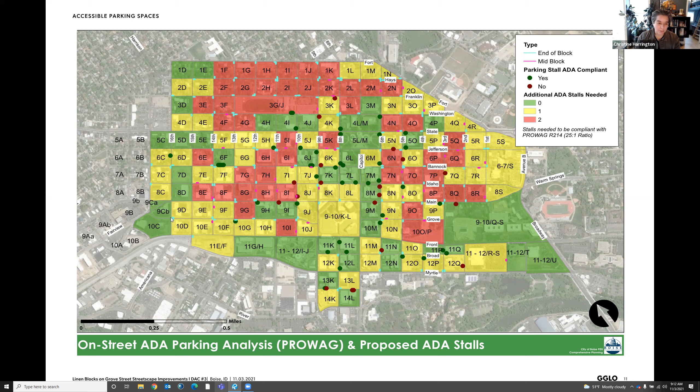So let's take a look at parking and circulation. We heard your feedback that parking is really important, so we want to maximize those as much as possible. We also have to adhere to the proposed ADA stalls from a study done by the city.

Our blocks are right here, and as you can see, we have quite a few ADA stalls that we need to provide. So we took a look at our design and met with an accessibility advisory committee, who were extremely helpful in locating and helping us identify which areas those should be.

All in all, we were able to regain some parking stalls. Currently we have 102 parking stalls available along Grove, and we added some along the side street, which I'll show you in just a second. We have 11 ADA stalls scattered throughout the blocks, and we'll show you how incorporating those into our innovative design is enabling us to create a really great public realm.

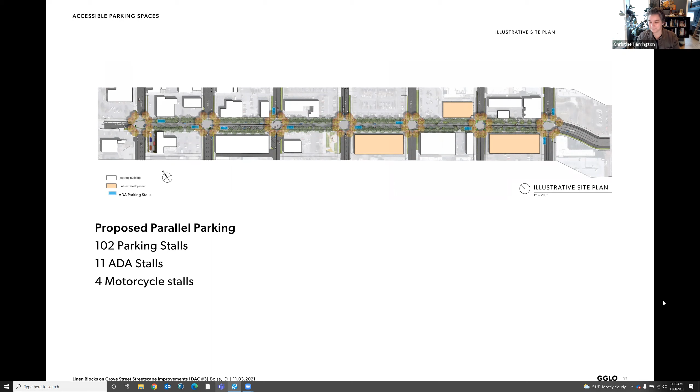To maximize the stalls, because of how some of them are oriented, we were also able to squeeze in some motorcycle stalls. We might be able to put more in — we'd like to get your feedback on that, but we're trying to squeeze out every single nook and cranny for parking.

Throughout all of these sections, I'm going to focus on a few different blocks to show you how the design has evolved. This is the block between 15th and 16th, and we'll take a couple of sections through these areas to show you how it's all coming together.

This may look pretty reminiscent of what we had shown before, but one thing you may not be noticing is that we were able to get ACHD to agree to reducing our travel lanes down to 10 feet. This was imperative in getting all of the parking stalls and ADA parking stalls on both sides of the street, and also increasing our pedestrian space and planting within that public realm. We're very excited that they supported us in that, so you'll see how that works throughout the sections coming forward.

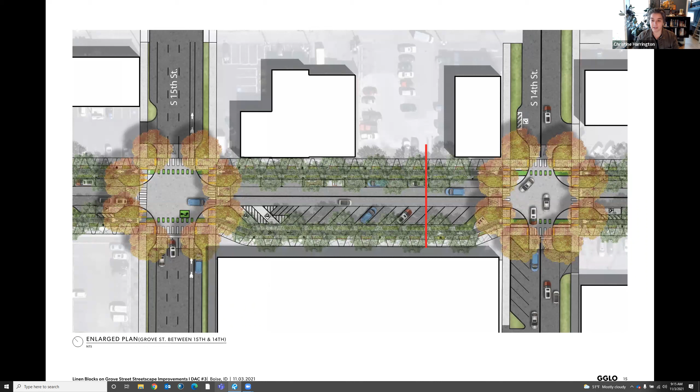So we're cutting through right here at an intersection, and we have these large planting and curb bulbs. We still have the 5-foot bike lane. We had to reduce the site furnishing and planting zone down to the 4-foot required space by the city, in order to maintain the 8-foot sidewalk, which also allows for some spill-out retail. The other thing you'll notice here is an example of a buffered wall and buffered planting for existing parking lots — we can talk about how that might work on your specific parking lot designs.

Now, this is the block between 14th and 15th. We've been working very diligently with the property owners to maximize the parking in this area. Through that effort, we have jogged the sidewalk and the bike lane over into the private property. The city is going to have a public easement in that area, and they're working through all of that in order to gain back angled parking, which maximizes the parking within this block.

As you can see, we have to provide front-end pull-in ADA stalls, which enabled us to squeeze in a little bit of motorcycle parking to maximize the area. Let's take a look at that section really quickly.

This is pretty much a typical block on the right-hand side, where we have our 10-foot travel lane in the middle, 8-foot parking, 5-foot walk-off strip and planting strip, 5-foot bike lane, 4-foot planting with pet rail, and an 8-foot sidewalk. Then on our unique angular parking, starting from center, we have the 10-foot travel lane, 18 feet of back-in parking, our walk-off strip, bike lane, planting with pet rails, and the 8-foot sidewalk.

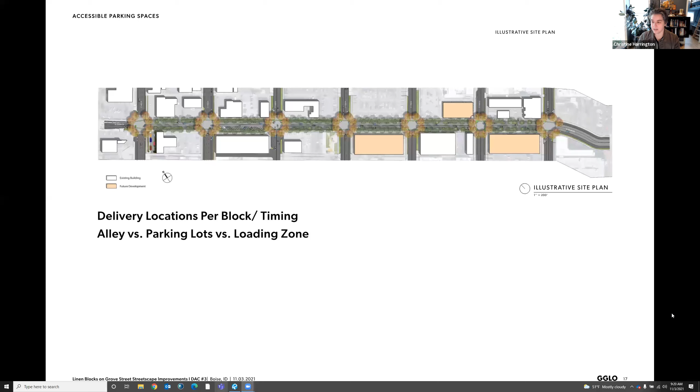Great. Anybody else? We'll continue to think about how that would work, and as we work through the parking regulations, we'll circle back with business owners to coordinate that. We want to make sure that we understand that you are able to get your deliveries in a timely fashion and make it easy for you. And also we want to ensure ACHD that there won't be giant commercial trucks parked in the middle of Grove Street. So we just want to make sure everybody is comfortable with the situation.

Okay, so we also talked a few slides earlier about parking lot screening. We think it's really imperative to create a welcoming public realm, and with that, it's really nice to have a buffer between cars and people. We've done that on the street side, and now we want to work with the private property owners to do it on the property side. So what we've done here is indicated some suggested areas of buffering. All of this would happen on the private property. Amy, can you talk a little bit about how we can maybe coordinate that?

Yeah, so CCDC, we cannot actually expend funds on private property. We can only do improvements within the public right of way. But on previous projects, we have had success in property owners approaching the contractor and working out a deal that they could do some private property improvements directly with that property owner while they're out there, just for some efficiency and maybe some cost savings to get cheaper improvements if you're interested in doing improvements on your private property. So that's something you could approach GGLO with as we get closer to construction, if there's improvements you'd like to see, such as these screenings that Christine's talking about.

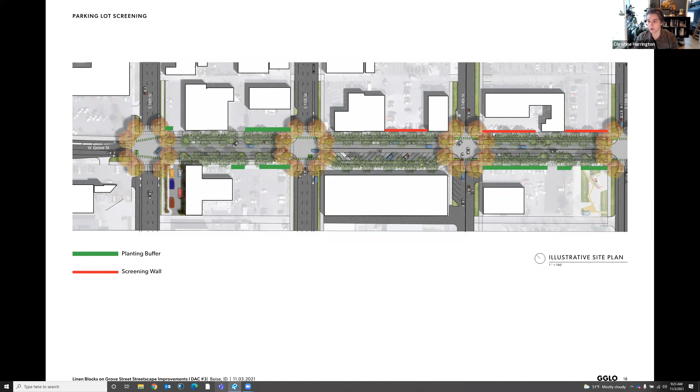So here, a lot of these planting areas may already exist and walls may already exist within this. For example, the planting out here between 15th and 16th is already there. The wall next to the Linen building is already there. Wall next to the Modern is already there. So we're kind of trying to create this pattern of buffering.

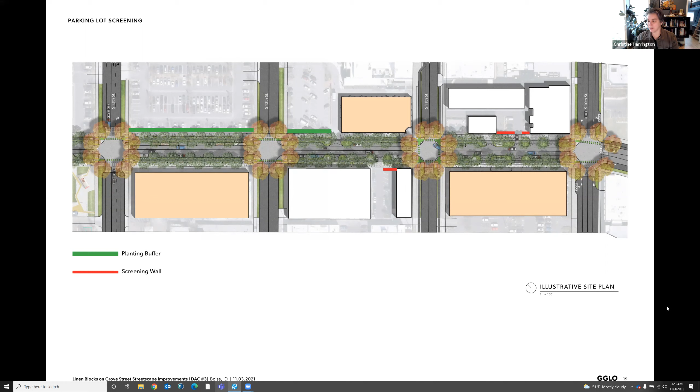Along Grove Street, the planting along the Idaho Power parking lot is already there, as well as some planting here. So just adding a few site walls might be a really nice way to buffer the streetscape. Any questions on any of that just shown?

This is Steve Welsh. I was just curious, so that angled parking, will that be open to the public or is that private parking? No, it's public parking. But we're exploring some regulations that would help with turnover, potentially doing some 20-minute stalls for those quick grab and go stops at like the liquor store or the beauty supply store, and just being strategic on how it's regulated so that we can serve multiple needs, including those business retails, but providing still public parking.

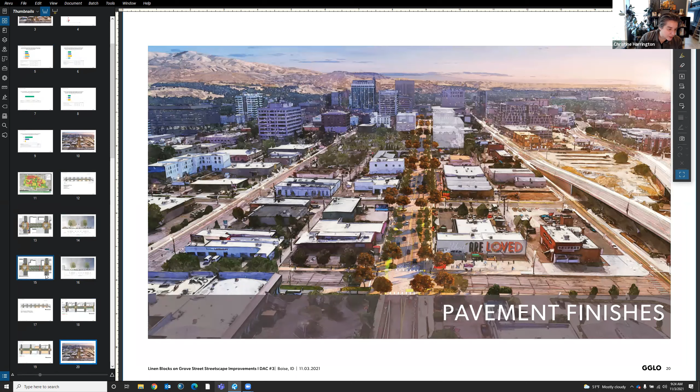I also forgot to show that. Let me get out of this really quickly. We also added some parking over to the side. We converted some parallel stalls here because we had enough room to have back-in parking here too. So we're trying to maximize as much as possible.

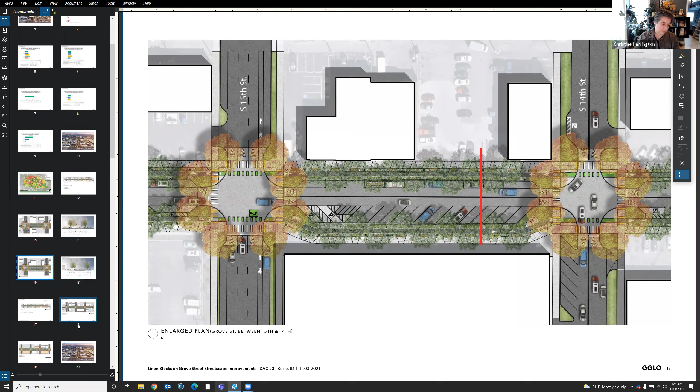We looked at doing that on this other side, but based on just the truncated curb, the linear curb length there, we were not able to maximize anything. So whether we did back-in stalls or parallel stalls, it was always just going to be 4 stalls there. So we are going to leave the parallel parking there, but convert on the other side of 14th to the back-in angled.

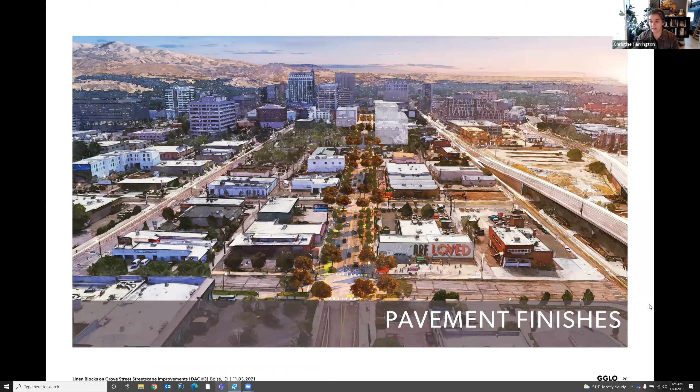Okay, so now going into pavement finishes. We're going to zoom in a little bit. We heard from you in the public survey that pavement finishes is an added bonus to the identity here. And what we've talked about before is keeping it pretty simple, right? We want to have something elegant.

We are thinking of this as more of the canvas that we're going to be putting a lot of other elements on. Think of it as the gallery walls that we'll be adding public art to, different planting to. So we don't want this to be the main feature, but we do want it to be elevated. So in that, we were thinking about how can we utilize the inspiration of the linen blocks and the linen building as kind of a takeoff for our design.

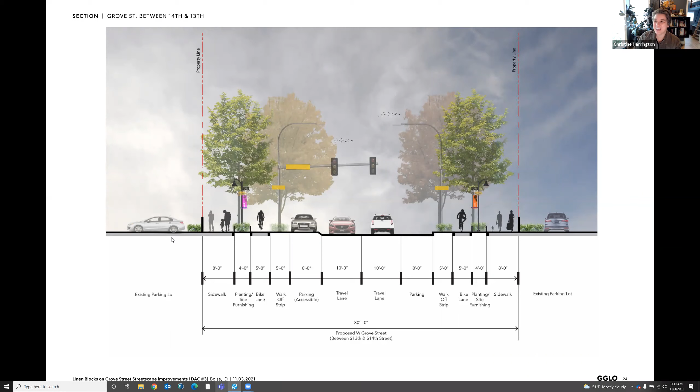So any questions about pavement finishes? Let me go back. Do you guys like that idea? Is it resonating with you, this more minimal color tone, but having a lot of unique textures that would create identity for the Linen Blocks?

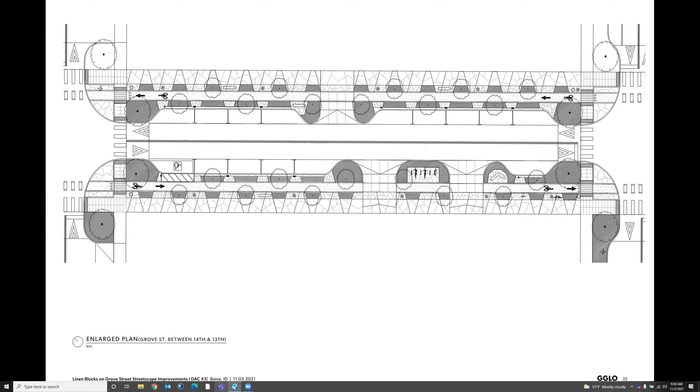This is Steve Welsh. I think it's really cool. Thank you. This is Elizabeth. I agree, I think it's really good looking. Great.

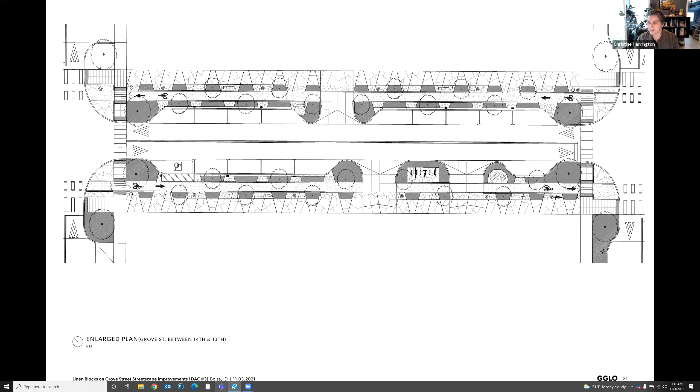It actually enables us to save a little bit of money on the concrete, since we're not doing multiple colored pours. So it's a really nice way to create a differentiator in this area without spending tons of money. We're excited about that.

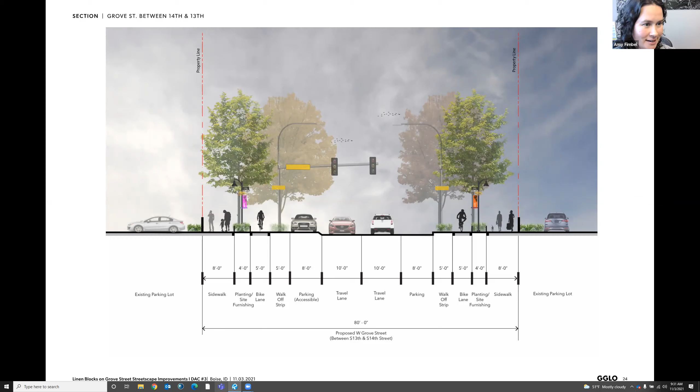We've got a good contractor that's great at concrete work, so they're going to have some challenges. It's all about craftsmanship. Squares of concrete are easier to pour than custom scoring jobs, but Guho's up to the task, so we'll be able to do it.

So the next steps we're working on with them is starting some mock-ups, like how do we get that linen texture? Is it through different types of broom finishes, or different types of stamps, or just how do we do that whole thing? We're going to start diving into that in the next phase of work, which is always my favorite, doing mock-ups and exploring that with the contractors and really getting a level of craftsmanship.

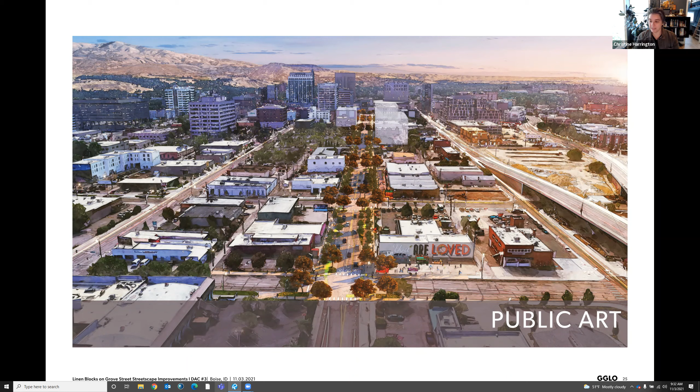So the next section is public art. We heard from the public that the neon sign museum, they were really enthralled with that idea. So we've started to work with Arts and History to create an art master plan. How can we overlay all these elements within the area? And then we can start looking at budgets, how we can maybe get some private donations from people to enhance some of these artworks.

Basically what we are looking at is creating an art billboard on the blank sign that's at 15th, expanding the public art frames on the walls that may buffer the parking lot and the sidewalk, and creating these art ports, which we're really excited about.

We've been working with the college and their art department. They say, hey, if you put these art ports out there, we will use them with our sculpture classes. So they're really excited to have a way to display emerging artists within the downtown area and the Linen Blocks area. And then also the historic Boise Neon Sign Museum.

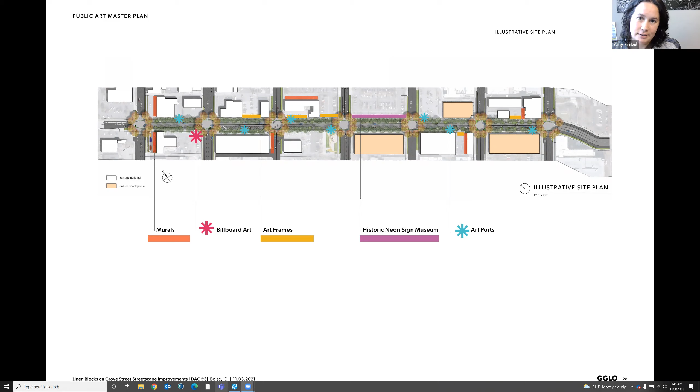I know you can do QR codes built into them, and kind of do a breadcrumb trail, like Christine's talking about, to lead them to the next public art, and you can really make this linear art gallery feel having them along this whole corridor.

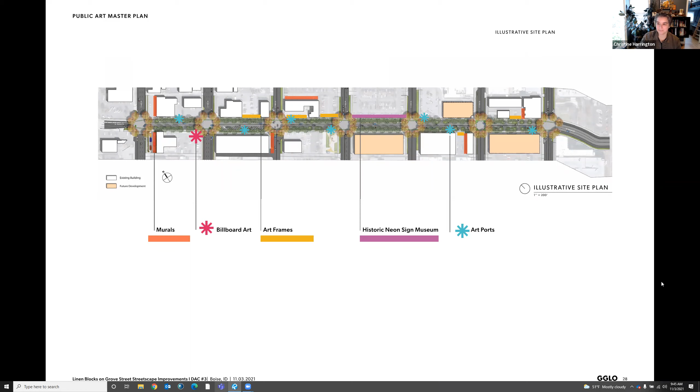Really good Instagrammable moments.

So as we start to look at these areas, we don't have an actual available neon sign yet, but we're looking at how these can fit, the height of the signs. Some are a lot longer, so would they overhang? Some are more linear. We're working with the contractor right now - once we identify the best candidates, they'll go out, take a look, weigh them, measure them, get an accurate understanding of what it will take to refurbish. Then we'll start to design the art port or foundation they would sit on. These will be, like Amy said, part of the public art.

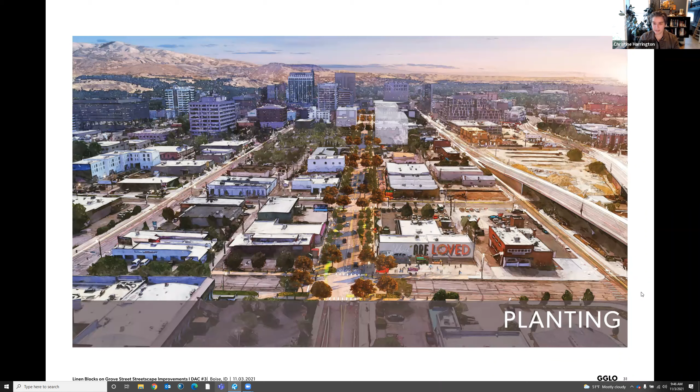Now going into planting, we've been working with the city on lots of different things. We are invested in doing silva cells for the trees, a variety of trees with as large a caliper as we can get into the areas, planting areas with pet rails - Parks and Public Works have supported that. Habitat for native pollinators - we've been working with Public Works and they've been supportive in helping us get that engaged.

A big win I'm really excited about is consolidated irrigation. Typically along the streets, each planting area outside of businesses has its own point of connection for irrigation. We wanted to consolidate all of that to run on one system, so we can ensure all the trees and planting areas get watered. If a building is sold and somebody turns off the water, we don't want all the plants to die in front of one building. We've worked with Parks and the city, and they are supporting this consolidated irrigation - we're really excited about that.

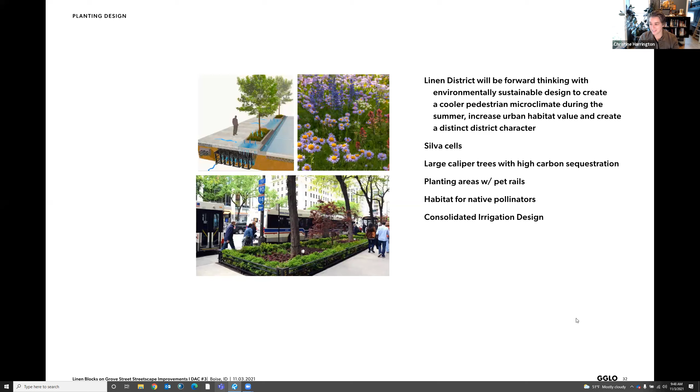I cannot tell you how excited. So we will be taking it away from you and all of your buildings and giving it back to the city.

So we've been working on the tree and plant palette. What we're looking at is creating this identity, these nodal trees at the intersections. We're looking at a very large tree species, potentially a northern red oak, and then intermediate interstitial trees being honey locusts staggered along the streetscape. Both are very large canopy and will provide a lot of shade - we're really excited about that.

Then as we looked at pollinator plantings, how do we ensure people understand their use and don't get confused, because pollinator planting areas can look a little wild. Most of us in the urban environment are used to much more structured planting. So we wanted to see how we can do a bit of both, so people understand where the pollinator planting areas are and that they're working in a specific way.

Parks has done this in areas throughout the city - they have a signage program that informs people what the planting is doing. So it's not just a wild, unkempt meadow of flowers, but a monarch habitat, a butterfly habitat, or a bird habitat. We're going to start looking at each pollinator area as we go, create different habitats that we'll identify, sign, and really educate the public about.

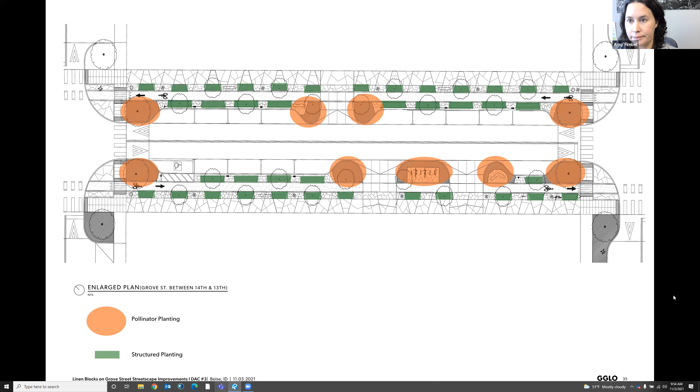While we appreciate you having all the controllers and points of connection in your building so it doesn't clutter up the street, we understand it's probably cluttering up your basement. Well, it would be easier if it was in the street, because the people who show up to blow out the sprinklers could show up any time of day and do it, versus having to coordinate to get inside the building.

Right, so just looking at how this lays out on this block. Again, we're proposing the pet rails only on the sidewalk side, not on the walk-off strip side or between the parking and the bike lane. We think that's the most useful and best use of funds to consolidate it there, since pets are usually walking on the sidewalk, not the bike lane. We think that'll provide enough buffer to maintain that.

One thing I have to say is that as we've cruised downtown Boise and all the streets, we've talked about this previously - there's either lawn or pavement within the right of way, whereas on areas like Capitol Boulevard we have planting. We've been told time and time again it isn't very successful, and I think part of that is the consistency of watering. So we're going to take care of that part on the design with the city.

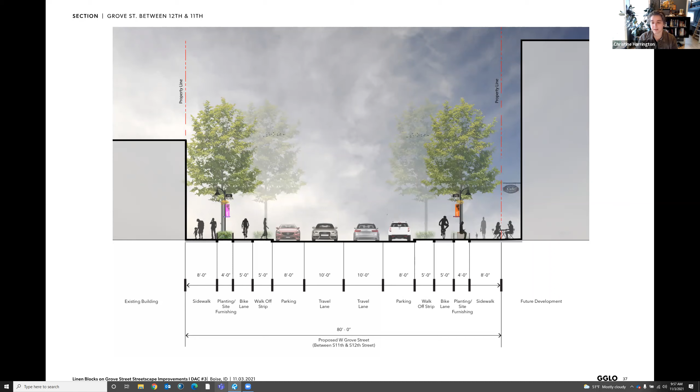Can you imagine a way this area could create some sort of stewardship or committee to help people who don't know about planting or gardening - or organize volunteers to come out and do a cleanup party? Is that something that as business owners and stakeholders you'd be interested in? The thing we don't want is to create all these planting areas that just die, so we're going to need some help. What are your thoughts?

Well, my thought is I'm doing it now anyway, so yeah, I'd be willing to do it. Great. Yeah, we'd be willing to do it as well. Excellent.

So we have 2 people that will do it. Come on, Dave, get on your gardening gloves and lend a hand.

I'm sure we will take part. Andrew, can we organize an Idaho Power garden cleanup, workforce planting cleanup? Maybe a volunteer opportunity. The maintenance budget gets squeezed every year though. But you guys have volunteer elements that you do throughout the city, right? Well, like Rake Up Boise, stuff like that. Just employees trying to pull together and do something like this. This could be a candidate for something like that.

Kim dropped something in the chat. She said, can the planting areas be adopted by an educational horticulture group, like a university, the way they're providing the art for the sculpture areas? It would be a way to teach them and show off horticulture art. And I know when we talked to Jennifer Tomlinson at Parks, they do utilize a lot of volunteers to maintain their native gardens currently.

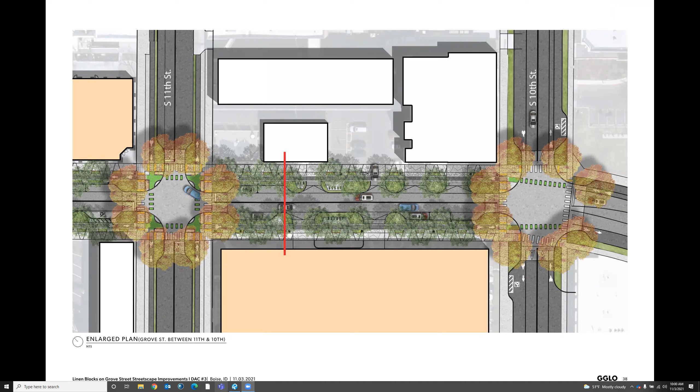Really, we were just trying to achieve and maximize parking, to offset the loss of off-street parking that was occurring in that block between 14th and 15th. That's why we chased it down 14th, to try and offset that loss for those retail establishments. That makes sense.

Jordan had a good comment that master naturalists and master gardeners actually have to do so many volunteer hours to get their certification. So there might be an opportunity there to help them get their certification hours while providing some good service. Yeah, and it might be something for when we have the grand opening of this, or a big kickoff.

Somebody should organize a garden show out here, or a plant swap on weekends, to really drive that home and get some signups. Because we can build all this stuff, but somebody needs to program and organize it. We're outside of the Downtown Boise Association, or it kind of straddles this, so working with them, and maybe a Linen District or neighborhood organization, could spur some of these, because sometimes it's just organizing it and knowing who to contact. I think that would be really helpful for this area, because you're going to get a lot more people down here very quickly once you build it all, and we just want to make sure it keeps looking great.

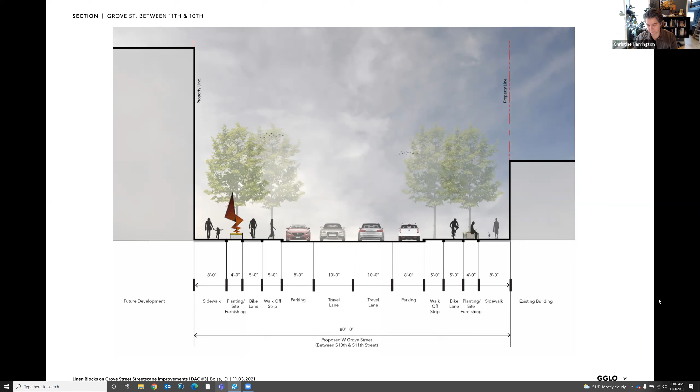So again, we talked about these art courts and where those would be located. We believe those would be located in this kind of site furnishing zone. Sorry, this overhang could knock somebody- that would not happen. We'll make sure that there are requirements being met, so it's safe and also really a cool activity as you walk down the site.

Okay, so the other thing I wanted your feedback on is a preference. We're going to be doing these pet rails along the planting adjacent to the sidewalk. Want to get your preference on the style. Do we want something more traditional, like the Boise streetscape standard you can see along Capitol, or something more modern? Want to see your take on these two different styles and which direction we should go in.

Personally, I like the more modern one. More modern, again, I agree. Okay.

Jeremy with Mr. Car Wash said he likes the more modern one too. Great. And I think this looks like it protects the plants better too, something higher. Yeah, Kim agrees with the more modern one. Great, okay.

I think, with the feedback we got from the accessibility community too, which didn't like as many vertical pickets because it would risk the chance of a cane being caught in there.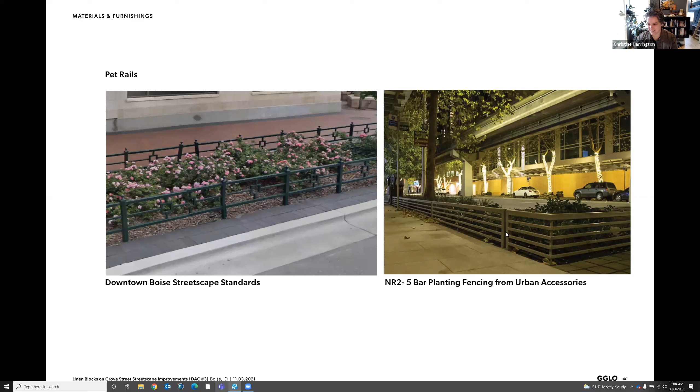Excellent. Do we get the monorail too as part of the NR2-5? I don't think that's within budget, David. That's in phase 500. The monorail going from the Linen District downtown would be cool. I'm glad you noticed that and know your Seattle, downtown Seattle areas.

Okay, so now just a quick run through of site furnishings, get your take, a yay or nay. So what we'd talked about before is taking cues from the Linen Building, something very sophisticated with whites, grays, and blacks for greater legibility and a very classic look. So we're proposing staying with the historic.

Hello, how are you today? Oops, sorry, crazy neighbor. Let's see. Hi there.

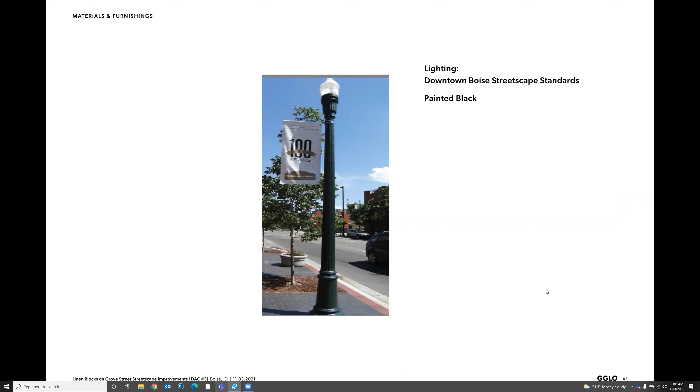We're proposing using the Boise streetscape standard, but we're going to request it be painted black instead of green. Pretty much all of the furnishings, we're going to want painted black if possible. Same thing with this - use all the streetscape standards, but painted black.

Where we want to get your take is on the seating elements. The design team is teetering between two different ways of looking at it. Do we want to create something unique, like a folded linen-esque cast-in-place or precast concrete bench that we can use at different angles to maximize seating in different ways? Or do we want to stick with the downtown Boise streetscape standard? Wanted to get your feedback on that.

Well, I like the more modern one, especially where you're not going to have the brick pavers - you're going to have the impression concrete - where I think this more folded concrete bench works better. Good point. Yeah, it kind of flows up and creates that sidewalk and bench being one thing, right, with that folded linen feel. I agree, I like the folded concrete bench.

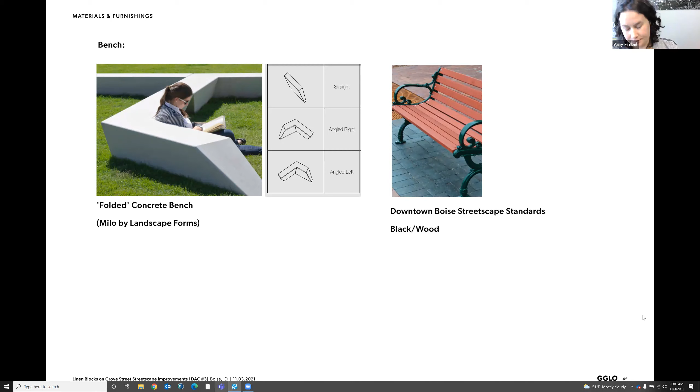Kim in the chat said she prefers the modern folded bench - it leads the eye rather than being on a fixed point. That's a good point. Great, okay, very clear, thank you. Is there another chat? Yeah, skate stops are important, especially with the skate park around the corner. Yes, very good point.

Okay, so that was all the feedback we wanted on individual items. Now we wanted to step back and ask you all, are we meeting these design principles? So we tried to keep these all in mind, just want to make sure we're hitting the mark on all of them. Integrating historical uses and forms and cultural storytelling elements to create a distinct place. Ensuring the street is designed for a range of mobility options.

I have to say we're doing that already, so I give ourselves a thumbs up for that one. Activate the area through public and private gathering spaces, programming and events. Design the streetscape and public space to support and attract an 18-hour environment and employ environmentally sustainable design. So I wanted to get your feedback - is there any of these we're not hitting that we need to try harder at? Are we doing a good job? What do you think?

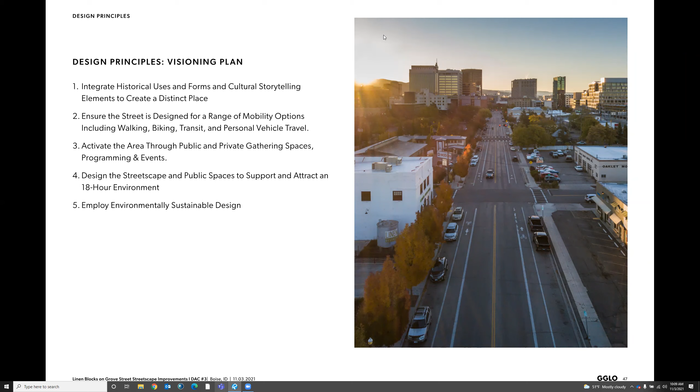No, I think you're doing a great job. I think these all work in your design. Great. Agreed. Great, I also agree. Excellent.

Okay, looks good to everybody for the design principles. Now, the last thing we showed you is we did all of these case studies of what makes good street typologies, and we've now filled in our row. These red ones, we do not indicate right now. Wanted to double back with you. Of course, we don't have to have everything green, and sometimes it just doesn't make sense to. So I wanted to double back, make sure that if something isn't green, that's okay, or there's a reason, or it's something we want to fight for.

So the first red one is under site furnishings, and it's water fountains. We went back and forth on these. It was on our list of nice to have, especially with the pandemic and how concerned people are. It seems like people are getting away from that a little bit, but we'd like to hear your comments—should we include water fountains? Should we try to squeeze those into the right of way? We were even looking at maybe not water fountains, but bottle fillers too. So it could go either way.

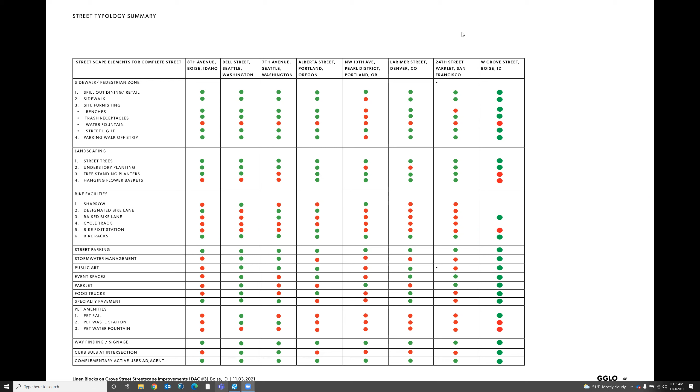Well, I think they'll take their pets regardless. Most of the patio space will always have water available. But we probably need more pet waste stations throughout the entire downtown, simply because I know people just leave the waste there from a lack of having a bag on hand for some reason. Gotcha, okay. So we will look at pet waste station locations.

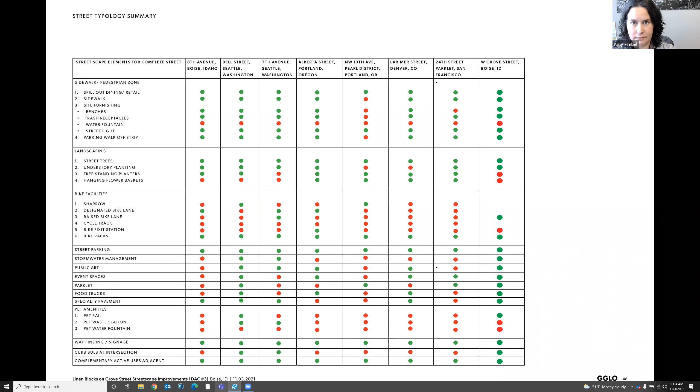Okay, and then, yeah, those are pretty much the only other ones that we had. We're going to be doing everything else. Kim asked if pet waste stations can be incorporated into a regular type of trash can. Typically they're on a standalone pole that has a container that houses them, but that's a really great question—we can look and see if there's a product that has that. Because why do it in multiple places if you can have it in one place? That's great.

Make a note of that.

Thank you, everybody. We will take all of this feedback and show our preferred elements—the benches, the pet rails, location of the neon signs, the pavement finishes, everything we've gone over here. We will consolidate all of your preferences, and that's what we'll present to CCDC, ACHD, and the City Council, and also put into our design review submittal. We'll have a great open house in early December to show you all the latest renderings. We're still working on those, so stay tuned. You'll get an invite, and you'll see all the pretty pictures combined into one package.

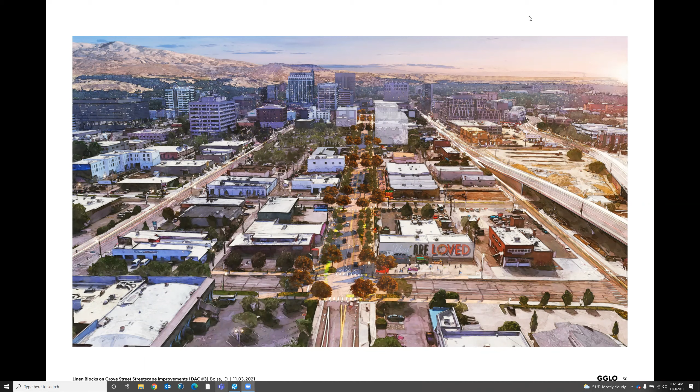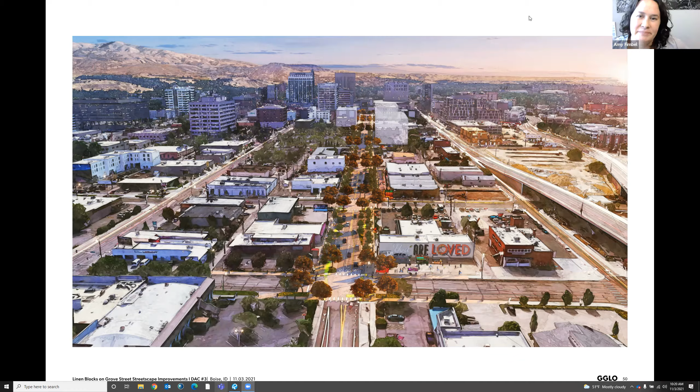And Amy, if you want to talk to me one-on-one about that irrigation and how—I think it would be really simple to connect it. Yeah, I agree for sure, I just don't think we're quite there on detailed design yet, but it's on our radar and we'll make a note on coordinating that with you. It's evident to me right now because I just had to do it. Yeah, no, I definitely agree.